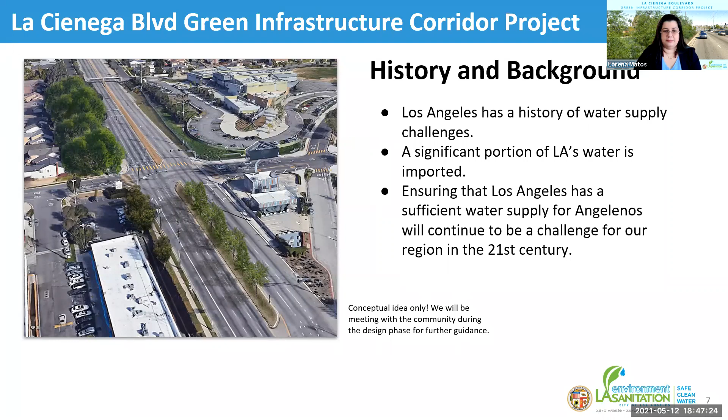Why the Safe Clean Water Program, also known as Measure W? It was approved by LA County voters on November 6, 2018. This multi-benefit measure provides cities in LA County with funds to capture, treat, and recycle stormwater. The goal of the measure was to provide municipalities within LA County with the necessary funds to implement projects that could capture stormwater.

The county program provides local, dedicated funding to increase water supply, improve water quality, and provide community enhancements. Municipalities have been in great need of help to push stormwater capture projects forward.

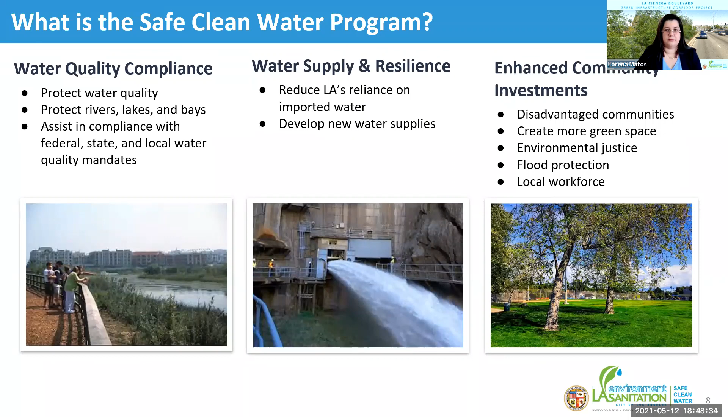This project will assist with reduced flooding, mitigate dry weather flows, provide water quality benefits, green the project areas, and reduce accumulation of trash on the project.

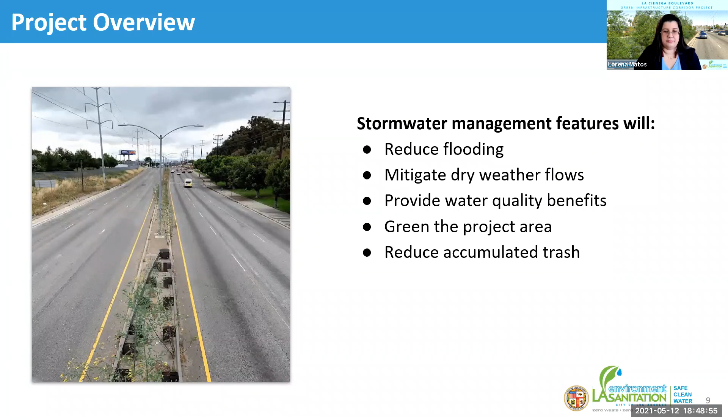The site is located along La Cienega Boulevard. It's about half a mile long and located between West 64th Street and Short Street. The project area includes residential, schools, restaurants, and retail shops. La Cienega Boulevard is a heavily utilized road with 6 traffic lanes in the project area, and the 405 freeway is located about three-quarters of a mile southwest of the project site.

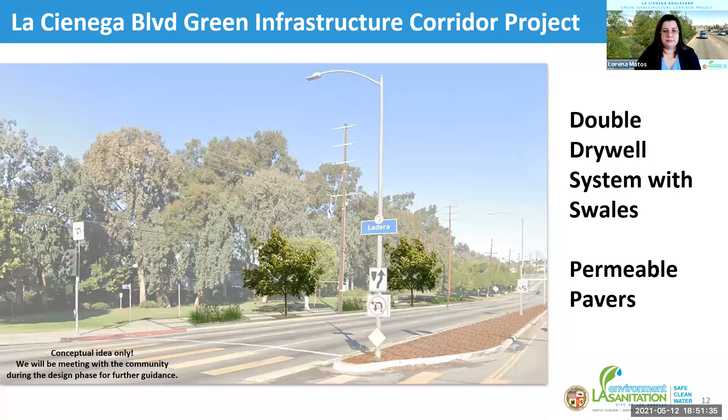The community will be receiving benefits from the implementation of a green infrastructure corridor. The area will be greener and have more beautiful outdoor spaces, which will contribute to the overall improvement of the area. The features will also help reduce flooding in the area. The project will provide the community an opportunity to be involved in the maintenance of the green corridor.

Furthermore, the project will become part of the local network of features funded by Measure W, which seeks to modernize the water system infrastructure using a combination of nature, science, and new technology, help protect health, ensure safer, greener, healthier, and more livable spaces for all, and prepare the region for the effects of changing climate, including recurring cycles of drought, wildfire, and flooding.

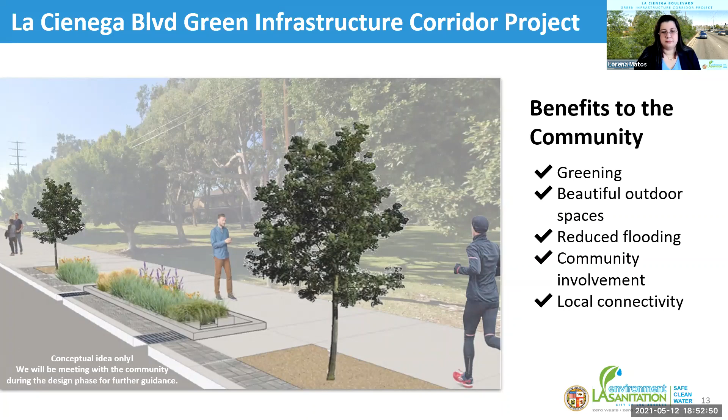The project would allow for stormwater capture, infiltration, along with street purification.

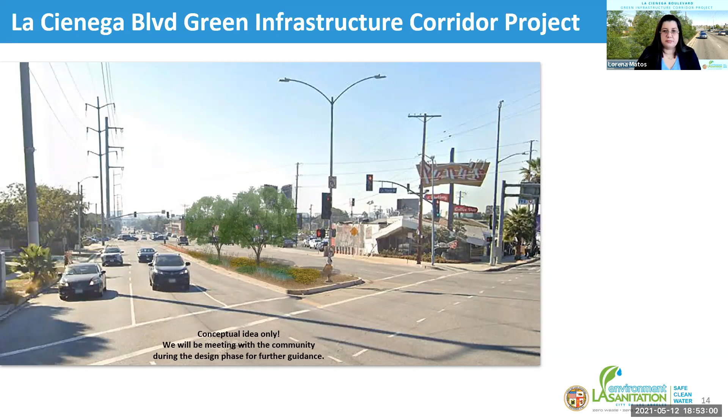The project is currently in the planning phase. The design phase should start within the next 2 to 6 months, and it should take about 12 months from start to finish. All the images that you have seen here are just conceptual representations of the design.

We'll be meeting with the community during the design phase to gather your input on the design. After the design phase, we will go to bid and award, which should start and that process will take about 6 months. Construction is expected to take about 12 months to complete.

Once construction is done, the team will monitor the project and make minor adjustments based on their observations.

The project is included under the 21-22 budget request to the Safe Clean Water program to cover the design phase. In the 22-23 budget cycle, construction costs should be included in the budget request. The estimated construction cost for this project is about $1,435,000.

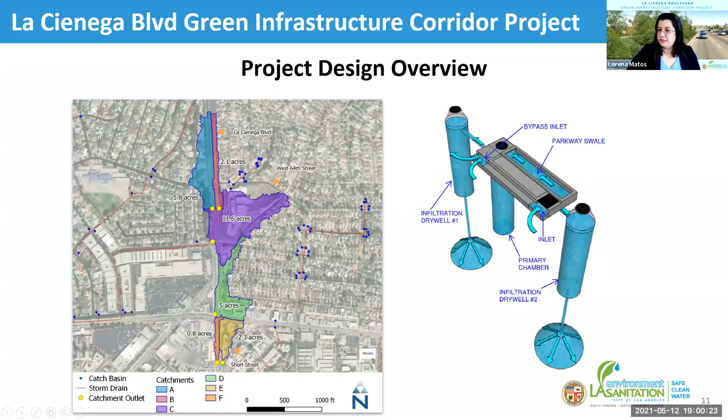I think you may have already answered this, Lorena, but I'll repeat it. Rick says there is a median north of 64th Street, and he's asking will it be included in the project? Let me go back a few slides so I can show the project area. This is the bridge at 64th, and everything south of 64th all the way to Short Street will be the area of the project.

I believe you may have already addressed this as well, but I'll ask it again. Connie says we have concerns about the recurring landscape maintenance. She asks, is regular maintenance included in the measure, and if so, for how long?

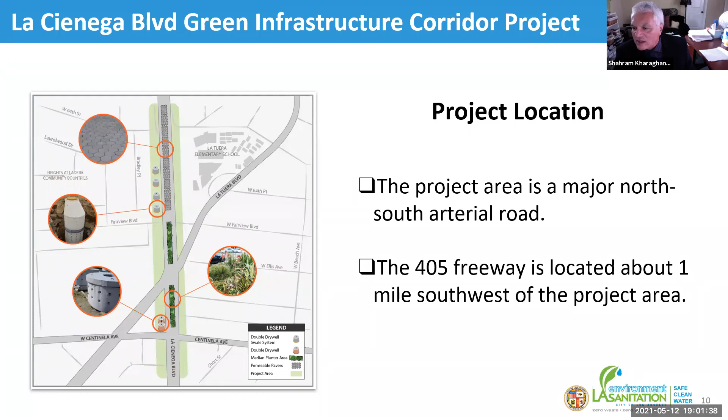Joyce asks if she can add to what Lorena mentioned. This is Shahram Kharaghani from Sanitation. As a part of any project, construction and design comes with operation and maintenance. So we would ask, about a year before completion of the project, for Measure W operation and maintenance money. Based on the plant species we've selected, we would have an operating standard for taking care of the greenery implemented as part of this project. So the funding would be provided, and LA Sanitation would operate and maintain the median and the parkways that we have greened with your input.

And Shahram, do we have a sense of how long the operation and maintenance would go for, how many years? So it's going to be in perpetuity, because these plants need care almost on a yearly basis. So once we ask for money, it would be for the next 30 years to make sure the plants are established. It's going to be for a long time to sustain them.

Okay, thank you, Shahram. We have a few more questions. Connie asks, will we lose the number of traffic lanes on La Cienega due to this project? So I'm guessing Connie wants to know if any traffic lanes will be lost on La Cienega. At this moment, there is no plan to reduce the traffic lanes for this project.

How about during construction, Lorena? How would the traffic flow be impacted? The design team will be preparing a transportation diagram that will help us with any closure of lanes or any diversion of traffic. We will be working with the council district to provide them all the information ahead of time, so it can be passed on to all the constituents.